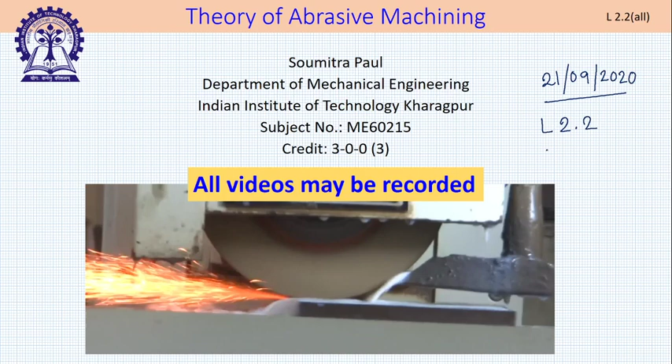Okay, let us start. So today, just a minute. Today it is 21st of September. Our lecture number is 2.2, and today we will be learning about grinding cycle. So let us see what is grinding cycle. Without going into any explanation, let us look at this video. It is very important that you look at this particular video.

So this grinding machine is a very small grinding machine. Safety norms are not being observed. I would never recommend anyone to be near such a grinding machine or using such a grinding machine. See, this is the grinding wheel. It doesn't have a wheel cover. It is extremely dangerous. The grinding wheel is rotating in this direction, and this individual is standing here without any protection, and there is no wheel cover around. However, it is serving my purpose. It is unfortunate that I am using this video, but it is serving my purpose.

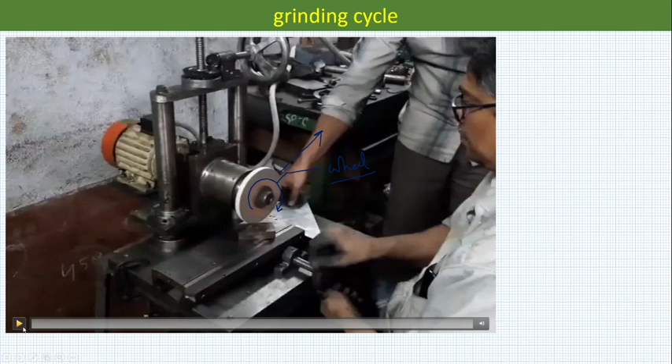So what is this guy doing? What happened? He is giving down feed now. Just now, if you have seen, he is giving down feed.

So now this guy is giving a down feed. So as he is giving the down feed, the wheel is coming down. There is a rudimentary mechanism to take the wheel down. These are all rudimentary mechanisms. This is a built up thing. It's not exactly a professionally made grinding machine, but it will serve my purpose.

So after that, what is it doing? He is giving VW, and as you can see, the spark stream intensity is very low, and strangely enough, as you can see, he is not giving any further downfeed, still there is machining going on. What does it mean? It means initially if he has given 20 micron of downfeed, in the very first pass which is going on now, that 20 micron was not removed. That 20 micron was not removed.

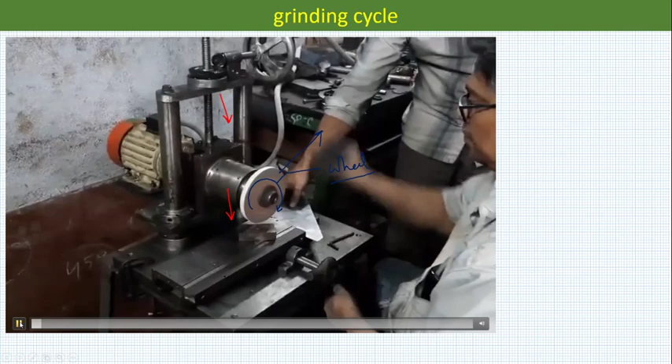So here he is giving, this is the first pass he is giving, and that 20 micron was not removed. Without giving any further downfeed, if he reciprocates, as you can see, he is doing that, he is getting further removal. So this is the first pass, second pass. However, gradually the intensity of the spark is reducing. So our observation is something like this.

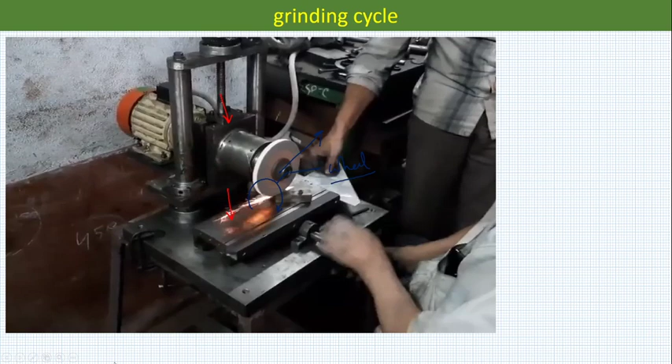He is giving downfeed once. Let us assume that downfeed is 20 micron. In the first pass, spark intensity is very high. Second pass, no downfeed, but spark is present. However, its intensity is down, and that goes on for third, fourth passes.

What is the concluding remark? Concluding remark is that 20 micron downfeed did not get removed in the first pass. So there is some problem. You are giving 20 micron, 40 micron, whatever you are giving, that is not getting removed. This is the example of surface grinding. This is occurring in all kinds of grinding.

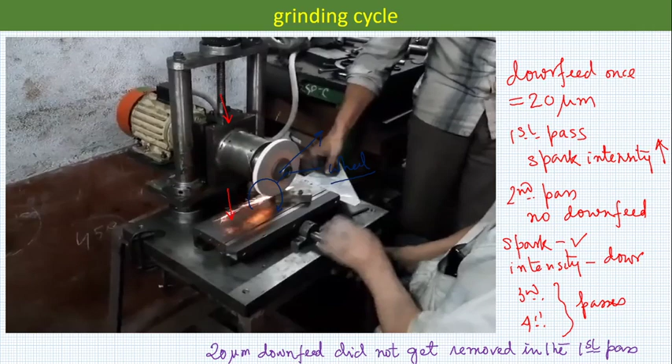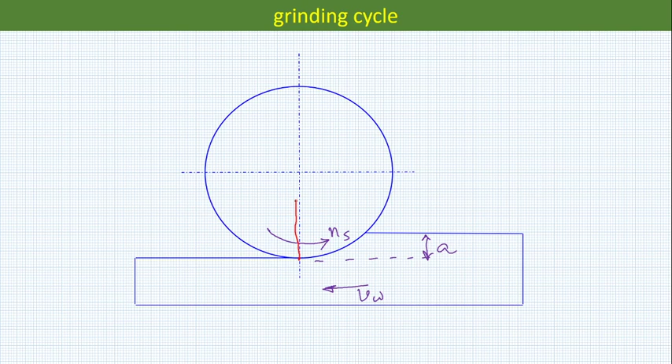Now, this is the classic grinding wheel, surface grinding situation. This is NS, this is VW, this is A. Throughout your course, you will see this diagram n number of times, and this particular grinding wheel is experiencing forces. It is experiencing a force in this direction, and this is experiencing a force in this direction. These forces are applied on the grinding wheel. We have already discussed grinding wheel forces, so these forces will get applied.

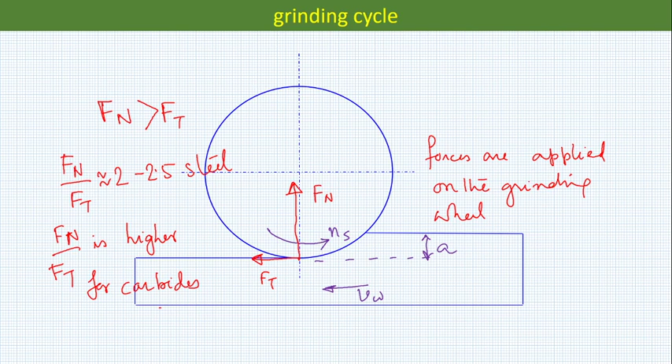One more thing you know, Fn is more than Ft. I do not recall whether I have given this fact earlier or not. Fn by Ft is typically 2 to 2.5 for steel, and Fn by Ft is still higher for carbides and ceramics. This I believe I have written earlier. There is one more thing, this being a plunge surface grinding operation, there is no axial force.

We do not require axial force to explain grinding cycle. The essence of grinding cycle is that in the first pass you give 20 micron, it doesn't get removed. Without knowing that, if you give another 20 micron in the second pass, something happens, and again in the third pass. This gentleman knew that in the first pass if he gives 20 micron, it doesn't get removed, so he gives second, third, fourth passes without adding any further downfeed.

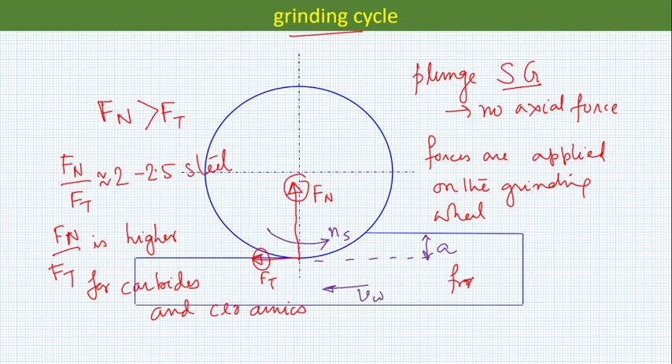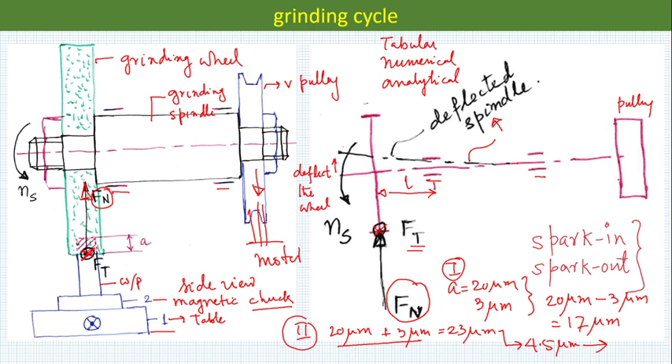How can we analyze this game? This particular thing we can analyze using 3 methods: one is a numerical method, one is an analytical method, another one is a tabular method, just for demonstration. This does not capture all the physics, it is for demonstration of grinding cycle. What is grinding cycle? To demonstrate that, this tabular method is excellent, and that's what we are going to do initially.

So all are inside, no one is waiting in the lobby, so we can continue.

So this is the tabular method. There is too much data in this particular thing, so do not try to look at the whole slide, I'll explain them one by one. First, concentrate on this table, only this table, whatever is given here, not any other table. This is our table number 1. Do not concentrate on table number 2, 3 or 4. There is something given here, this is a 0th table, you do not have to bother about that as well.

This is what? This is pass number, designated by symbol P. This is set downfeed, how much you have set on the machine, designated by AS. This is effective downfeed — I will talk to you about this later. This is deflection in micron, how much is the deflection. In the previous slide we told you that the deflection is around 3 micron or so. This is the actual downfeed: actual downfeed is the effective downfeed minus the deflection in micron.

Yes, someone is trying to talk. What is it? Sir, board is not seen, sir. Screen is not being shown. Yes, sir, okay, please wait.

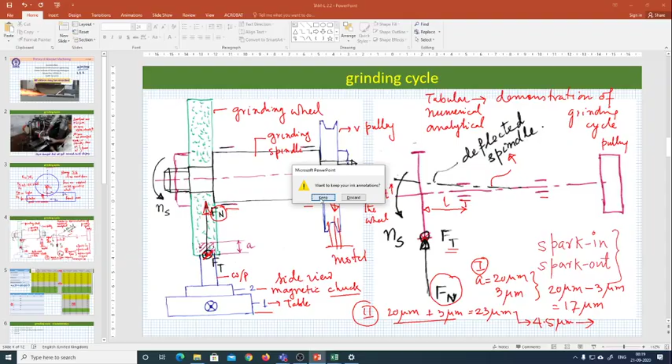So once again, you bother only about table number 1. Do not bother about table 2, table 3, table 4 for the time being, or table 0. I am explaining table 1, simultaneously explain table 0.

This is pass number, P. Set down feed is AS, effective down feed I will come to later on. Deflection in micron is this, capital D. Actual down feed is this, A, and effective or total down feed is AT, which is shown here.

How much is effective down feed in a pass? Effective down feed in a pass is whatever you have set in that pass plus the deflection in the previous pass. We are assuming we are using an old grinding machine, and in each pass whatever is your actual down feed, there is a deflection of 35%. So in the first pass, 0th pass, there is no down feed, total down feed is also 0, there is no deflection.

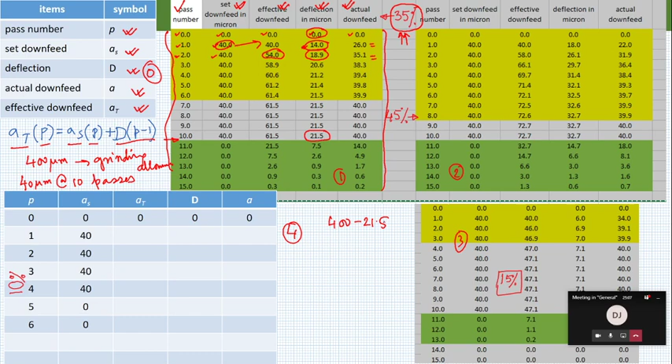Let us see whether it solves my problem or not. After 10 passes, as you can see, there is a total deflection of 21.5 micron. That means 400 minus 21.5, which is 378.5 micron of material has been removed. So the basic purpose of grinding, which is achieving better tolerance, is lost. However, operators know how to take care of that, and that is the reason after the 10th pass he provides a few more passes. In this particular case he gives 5 more passes, and let us see what happens.

I hope you can see because still the screen share is on. Now there is one more interesting thing. Your requirement was in each pass you should remove 40 micron of material. That unfortunately is not happening, at least for the first 6 passes.

So here the actual down feed is less than 40 micron. Where is it happening? It is happening from 7th to 10th pass. 11th pass you have not given any down feed because total 400 micron has already been given. Despite that, actual or effective down feed becomes 21.5. Where does it come from? It comes from the unmachined part which is remaining there from the previous pass.

And then the calculation goes on, and as you can see by the 15th pass hardly anything is left out. So you have almost achieved the tolerance part. This was demonstrated with 35% deflection, so it is an old machine, not a good machine.

If you go for 45%, this 6 becomes 8. Steady state grinding, this phase which was 4 passes long becomes 2, and after 5 more passes you have 0.7 micron still left unmachined. So this situation is even worse.

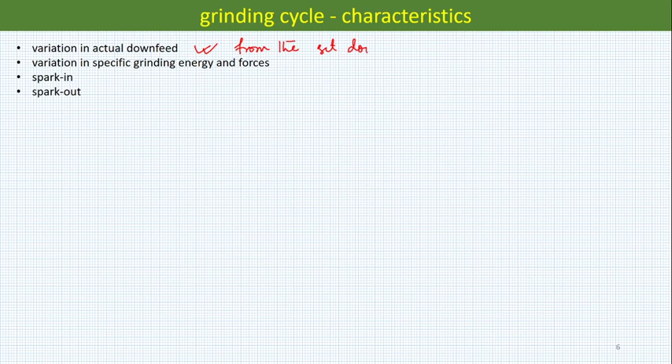So what are the consequences? Variation in actual down feed from the set down feed. So if I plot this, this is the number of passes or pass number, and this is actual down feed, which we have used as A. The variation would be something like this.

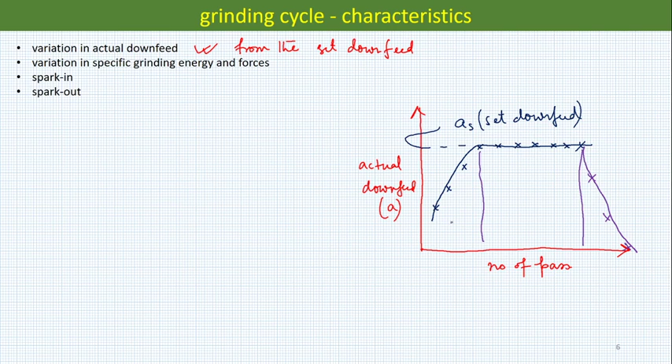And this is your set down feed. After 10 passes, or whatever is the required number of passes, what would happen? Gradually your actual down feed would vary. So this is called one particular phase, this is called one particular phase, and this is called another phase.

What are these phases called? The first one is called the spark-in phase.

Gradually the intensity of the spark increases because your downfeed, actual material removal, is increasing. Second phase is called steady state grinding, and the third phase is called spark out phase. Here gradually the intensity of the spark goes down.

Now, because of this variation in actual downfeed, UG varies, FT varies, FN varies. That I am not going to plot on this. That would come as an assignment at a later date, and you will get to do the assignment and you will see it for yourself. That assignment can be done using MATLAB.

I have come across, though I have forgotten, a particular resource available which is very similar to MATLAB, which is free and it can be downloaded and used. If you do not want to use MATLAB, this can also be done in Excel, but you need to know Excel better. So either you can learn MATLAB, which would be an asset for your career, or you can still continue to use Excel. And already I have explained what is spark in and spark out.

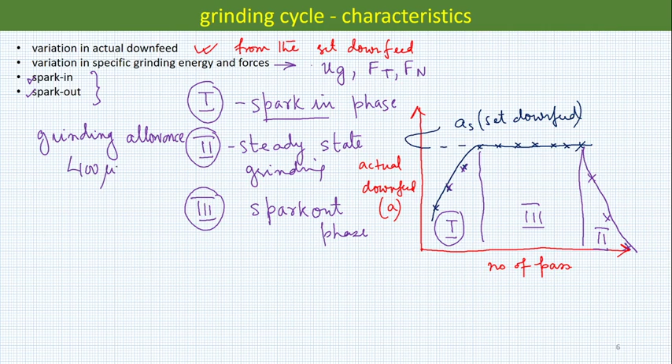What is the industrial implication of grinding cycle? Industrial implication of grinding cycle is that your grinding allowance in our example was 400 micron. This is too large a grinding allowance. What do you mean by grinding allowance? This is the surface. After machining, you kept 400 micron to be removed so that you get an exact dimension X. Okay, so this is grinding allowance, and you decided that this 400 micron you would remove by 40 micron passes

and 10 such passes. What you end up with in this diagram, this is the 11th pass, this is the 12th pass, and this is the 13th pass. You end up with 13 passes. So what happens to your grinding time? Grinding time goes up by 30%. So what happens to your productivity? It goes down. So there is a grinding cycle that we cannot avoid, but unfortunately we have to pay some prices. What are those prices? Because of existence of grinding cycle, the productivity will go down and grinding time will go up.

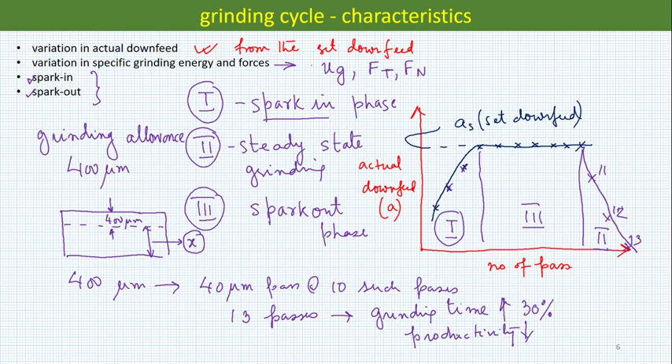Please try to understand, if it is not a plunge grinding, if it is a traverse grinding, and the size of the surface that you are grinding is say 400 millimeter long and 200 millimeter wide, and you are taking a CS, that is the cross feed or traverse feed of 2 millimeter, and you have to give 3 or 4 more passes just for sparking out, how much time would be lost for grinding? So it would become a very, very low productivity operation. However, we cannot avoid it. Because why? Because of this reason.

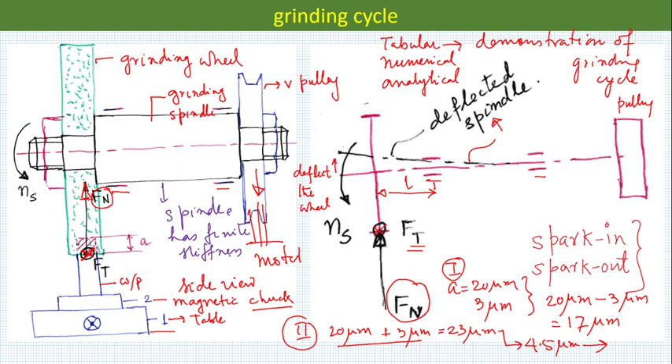Because my spindle has finite stiffness. Because of my spindle having finite stiffness, I cannot get rid of grinding cycle. It would always exist and I have to live with it. I have to understand it. And one understanding is that quite often operators would not give any downfeed and will give 4-5 finishing passes. So what he is trying to do by giving those finishing passes is to achieve the required tolerance without sacrificing other things.

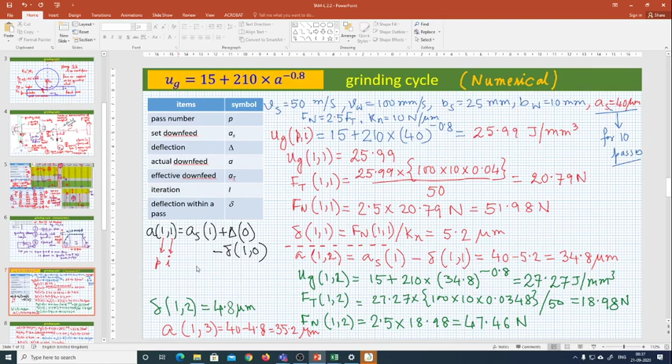Now we are going into a particular slide which is very crowded. So once again, this video would be with you, so you can always pause this video and later on try to understand, because this you will not be able to understand possibly in a single go, because this is typically done on a blackboard. I cannot do that because writing on a PPT is rather time consuming. So I have prepared this a priori. Though it is a synchronous class, feedback is less because of our nature of interaction.

So I have solved a numerical problem, and this numerical problem I have solved using numerical approach, not a tabular approach. Here we do not have any assumption that 10%, 15%, 20% deflection takes place. Instead of that, how much deflection is taking place is decided by somebody else. So here the whole gamut of data is given. Vs is 50 meter per second, Vw is 100 millimeter per second, that is 6 meter per minute, Bs is 25 millimeter, Bw is 10 millimeter.

It is a case of plunge surface grinding, and this is a numerical technique to solve a grinding cycle problem, and you have 40 micron passes, 10 such passes are to be given. What else? Fn is 2.5 times Ft, this is given as an information, and then there is something else given. This is the stiffness of the spindle, which is 10 Newton per micron. So if there is a normal force of 20 Newton, the spindle will deflect by 2 micron.

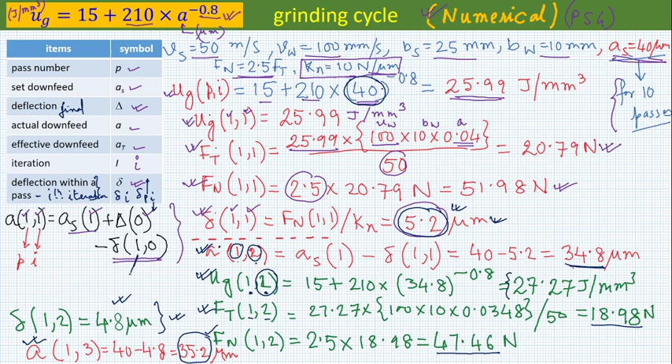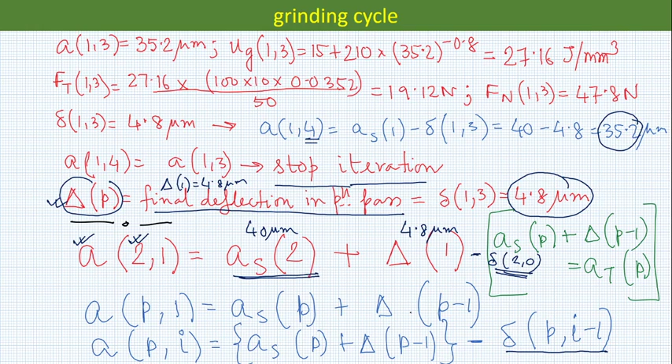Minus delta 2,0. It was also there in the previous slide. Delta 1,0. What is 1? Pass number. What is 0? 0 is the iteration. This is your first iteration. So delta in the previous iteration is 0. So in this way we carry on calculating. So here it is also given delta P, I minus 1. So in this way if you calculate, you will come here.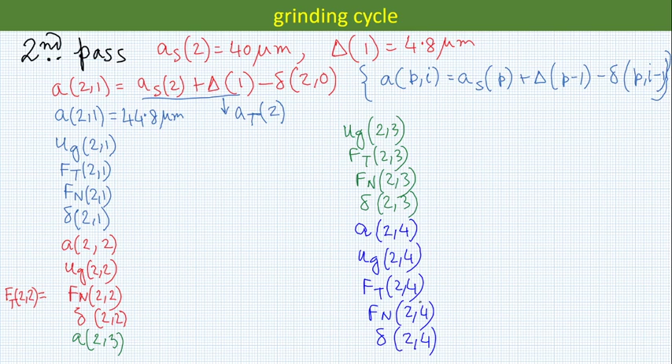Now there are two things. I'll keep this statement. You fill up this particular table using calculators, using an Excel sheet, anything. In that way you will solve your second pass, and then you will come to the pth pass. In the pth pass, let us assume that this is 8 micron and 11th pass, not pth pass, 11th pass, AS is 0 micron.

So A 11,1, that means 11th pass and first iteration, would be AS 11 plus delta 10 minus small delta 11,0. This is pass number, this is iteration number. So this one would become 0 micron. Why 0 micron? Because of this, plus 8 micron because of this, minus 0 micron because this is 0th iteration. So A 11,1 would become 8 micron.

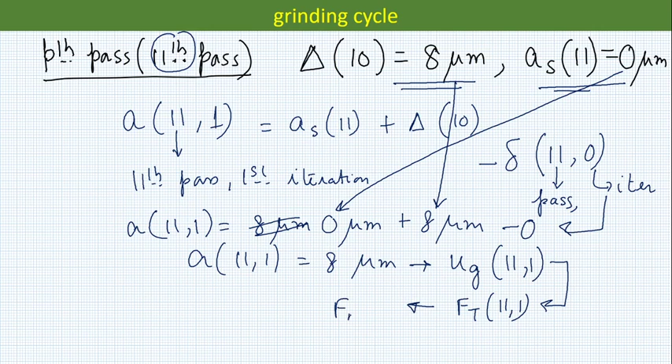From that, what would you calculate? You would calculate UG 11,1. Then you would calculate FT 11,1. Then Fn 11,1. Then delta 11,1. Then you will calculate A 11,2. How would you calculate that? AS 11 plus delta 10 minus delta 11,1. And once you have calculated this, then this cycle continues here. Only thing is that this counter gets incremented by 1.

I do not know C. Possibly in C, if you write I plus plus, that means it gets incremented by 1. I hope my C is good enough. I did not learn C. I am really old, not like you. You people do not know what is Fortran, and I do not know much about C.

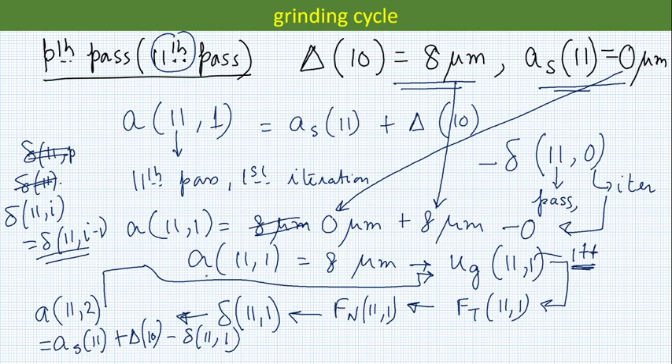So the iteration loop will continue till such time when delta 11,I becomes equal to delta 11,I minus 1, then you stop your iteration. And this will continue till 12, 13, 14 pass, till 400 micron material is removed. Now we will try to show you the detailed calculation.